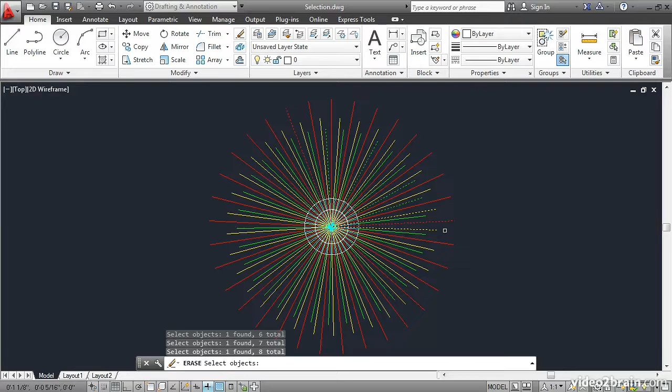First of all, the most obvious way to select something is by picking it directly. Click the Erase tool, and then pick a number of objects at random to select them. The advantage of this method is that it is so direct - you just click what you're interested in selecting. The disadvantage is it's very slow. It would take me a long time to pick all of these objects. Press Enter to complete the command.

Zoom in a little bit more to the core by rotating the mouse wheel. This time, let's select things more efficiently by using a window. Click Erase, and then click a point up here above the core, but not on an existing object. I'll click right here and move the mouse down and to the right. What I get is an encompassing window shown in blue with a solid border. This selects only the objects that are completely inside the window. So if I click down here, it appears that the circles and some of the lines in the core will be selected. Press Enter, and they're deleted.

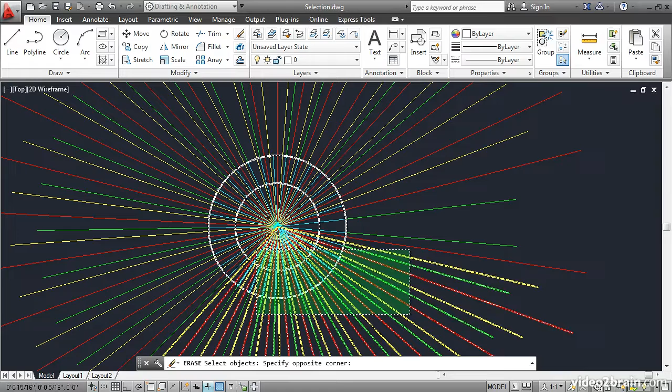Let's undo, and this time let's select with a different kind of window. Click Erase, and then click a point down here below the core and to the right of it. If I move the mouse down and to the right, you see that I have an encompassing window. But if I move it up and to the left, it changes into a crossing window. The crossing window selects anything that the window crosses, regardless of whether those objects are completely encompassed with the window or not. If I click up here, it appears that I select everything. I'll press Enter, and indeed everything is erased. Undo.

Another way to select objects that don't conform to a rectangular area is with the fence. The fence is a series of connected line segments that selects whatever it crosses. Click Erase, and then type F for fence, and press Enter. Click an arbitrary point someplace, and then move the mouse. You'll see that you're drawing a dashed line from the first point that you picked. This selects everything that it crosses. Click a point, and move the mouse to a new location. In this way, I can select all the lines that are around the circle. I'll press Enter to exit the fence, and then Enter again to complete the Erase command. Again, undo.

You can select everything like this. Click Erase, and then type All at the Select Objects prompt. Sure enough, everything is selected.

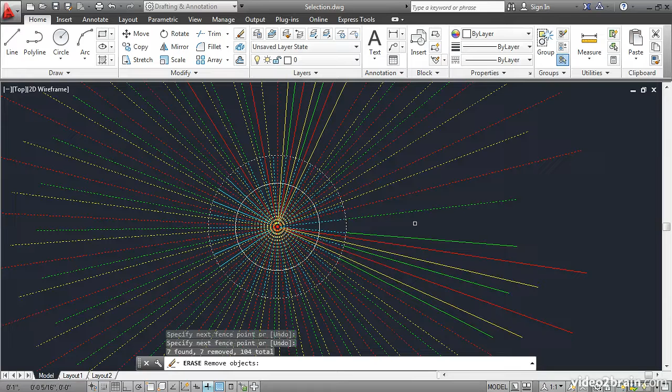And these will all be removed from the selection set. I'll press Enter to exit the fence, and Enter again to exit from the Erase command.

There are two selection methods that work when you're creating and manipulating objects. They're called Last and Previous. Let's draw a new object, how about a circle. I'll click a center point and a radius. I'll press Enter to repeat the command and draw another circle adjacent.

Now let's say I want to copy one of the circles. I'll click Copy, and instead of picking it, I'll type L for last. Last refers to the last object that you created. So I'll press Enter to select it, and then Enter again to exit the Select Objects prompt, moving on to the next part of the copy command.

I need to specify a base point, so I'll click some arbitrary point, and then move the cursor to a new location and click to specify the second point. I'll click once again to create a second copy, and then I'll press Enter to end the command.

Now let's say I want to move one of those circles. I'll click Move, and instead of picking something, I'll type P for previous and press Enter. Notice which circle it selected - it was the first circle that I copied. That's the previous selection. So now I'll press Enter to move on in the Move command, and then click a base point and a second point.

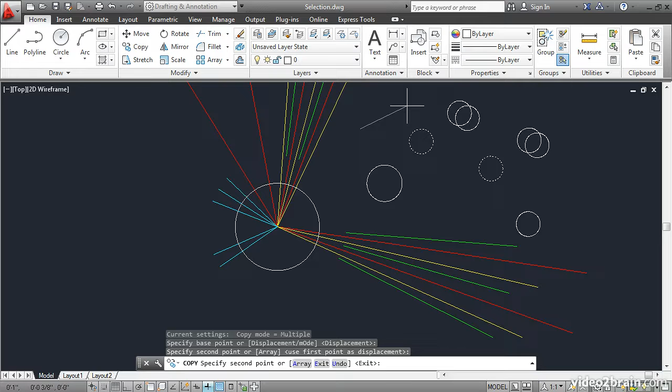Now let's explore a way to select similar objects. Go ahead and select one of the layered objects that has a color. In this case, I'll select this green line. Right-click and choose Select Similar. What happens is all of the lines which are on the same layer are selected. I'll press Escape. Both their object type and their layer must match to be selected with this method.

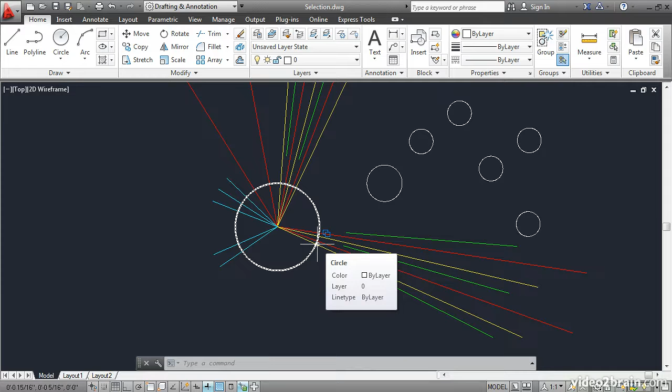Let's turn on selection cycling by clicking this icon in the status bar. Then move the mouse up here somewhere until you see this blue icon appear. When you do, it means that your mouse is over a couple of different objects that are very close together. This allows you to click and then choose which object you want to select from a menu. I can either select the yellow line or the white circle.

Let's try that again. I'll go over here in this dense area where there are a lot of objects, and I'll click. And then I have a choice to select the object that I'm interested in, and they highlight on screen, and this gives you a visual indication also of which object you can select.

The last selection method I'll leave you with works without issuing a command, so you don't even need to be at a Select Objects prompt for this method to work.

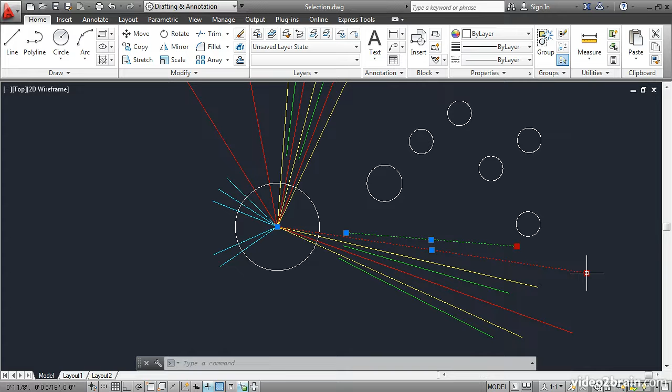Select a couple of objects, and this turns on their grips. Hold down the Shift key and move the mouse over one of the grips and click. The grip turns red. Go over to another grip with the Shift key still held down and click it to select. Now both of these grips are selected. Click one of the grips without the Shift key held, and then you can manipulate the objects.

The same spatial relationship is maintained because I selected them with the grip method. I'll click over here to complete this grip edit and press Escape twice to deselect.

So in summary, you have learned a plethora of selection techniques, including picking objects individually, creating encompassing and crossing windows, using a fence to select, selecting all, adding and removing from a selection set, using last and previous, selecting similar objects, using selection cycling for overlapping objects, and finally using the Shift key to select multiple grips.